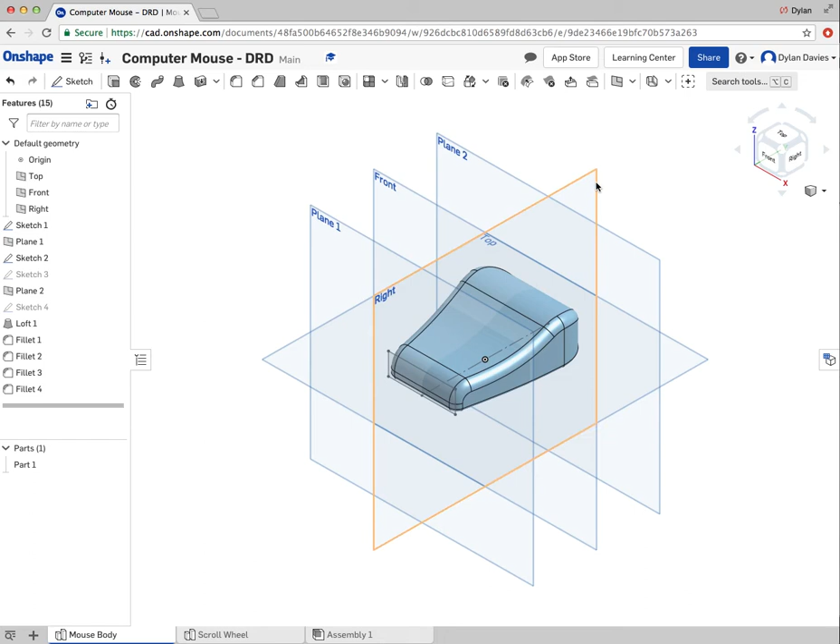So I'm going to draw a new sketch, view it from the right. I just need to make a position where the circle is going to go.

I'm going to start off by drawing a center point circle. I'm not going to allow it to snap to anything, but I'll create a center point circle that's going to be 26. You might be thinking, why 26 when I created a wheel that was 25? Well, I just need to give a little bit of tolerance so that the wheel can actually move around.

Because I didn't allow that to snap anywhere, I can now select the center of this circle and move it wherever I feel comfortable. Now, if I'm being honest, I'm looking at that thinking the top or first part of the mouse needs to be a little bit chunkier, so maybe we'll come back and resolve that at the end.

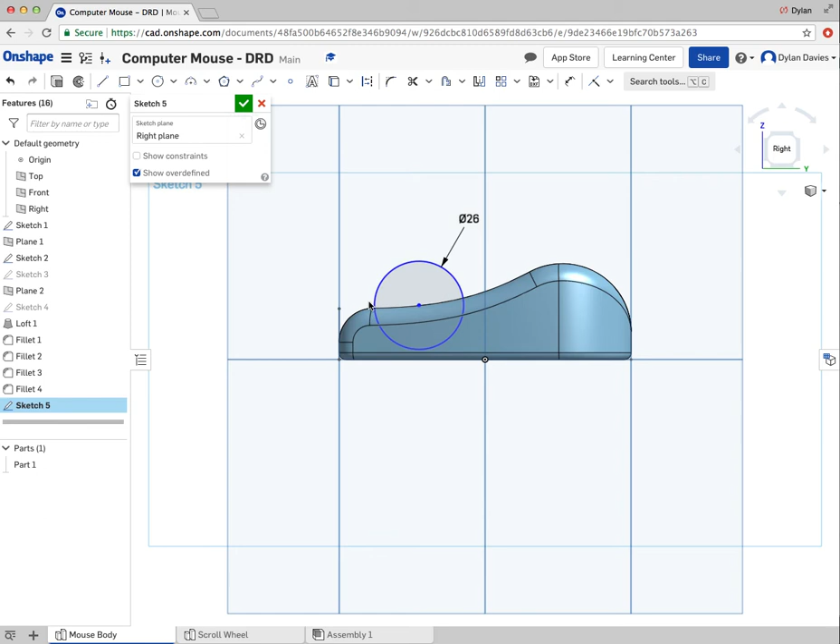So that's the whole part of designing, really. So if I press green tick, and I need to make a space, the thickness of the mouse wheel was 5. So if I now go to extrude...

...and select remove, select the sketch that I want to remove, so it's that sketch there. The thickness of my wheel was 5. Anybody spotted the mistake? Good, so I just need to add a tolerance. Let's add a tolerance of 0.5, or half a millimeter, and select the symmetric tool and green tick.

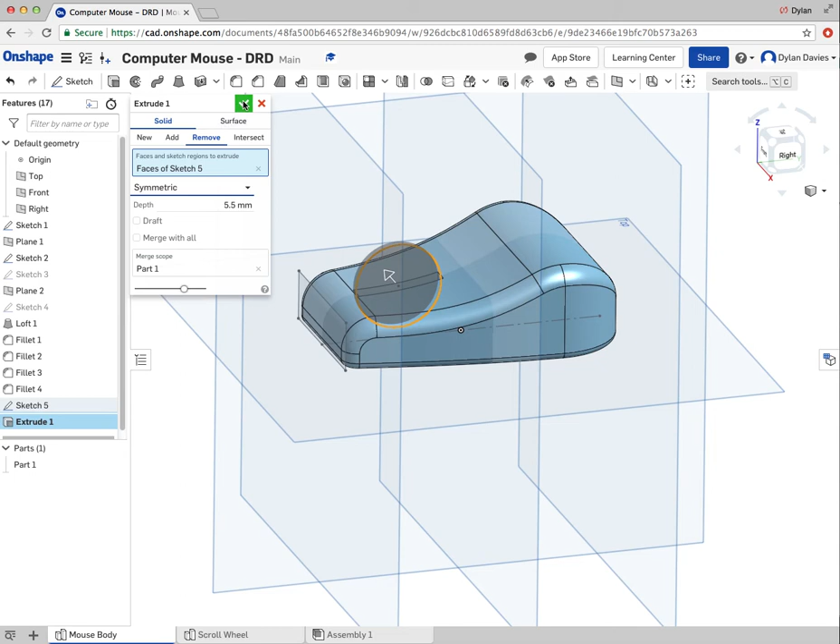Okay, so that's created a little housing for my mouse. Now, as I said, when I drew that circle, I could see that the wheel would probably be a little bit too large, so I'm going to make the front part of this mouse a little bit taller.

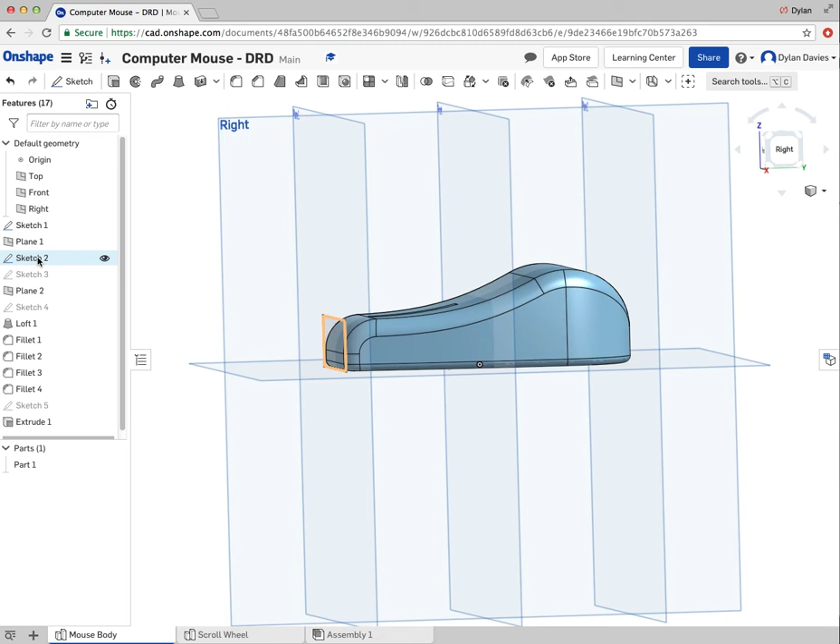So if I go back in and edit this sketch, so it was the first sketch I did, or second sketch, because I did a construction line. So if I click on edit...

Let's view it isometric. I'll view it from the front. Let's make this a little bit taller, take it up to 20. Green tick. Hopefully the rest of my drawing now should resolve as it does.

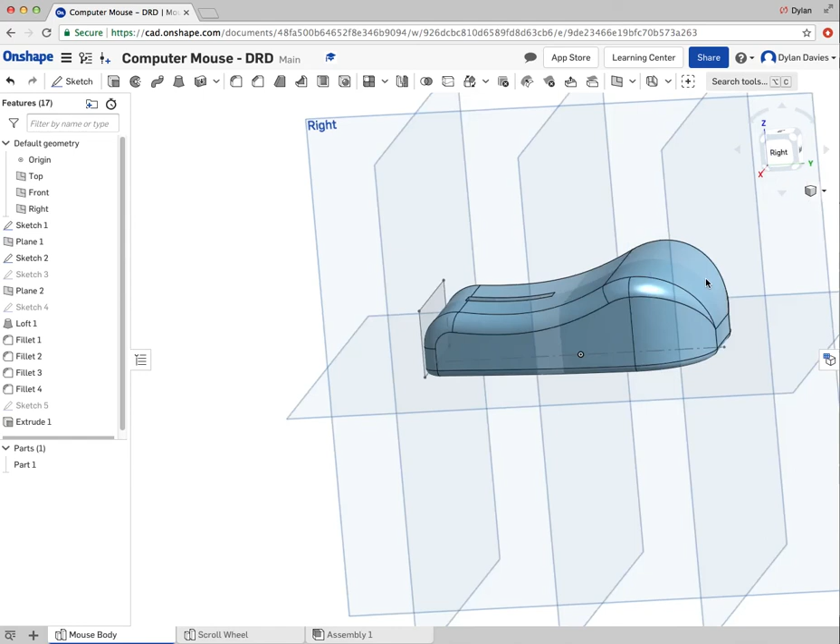So the next thing that we're going to do is start putting all of our parts together in an assembly. So I've got my scroll wheel there, I've got my mouse body. My assembly is something where I bring all of the parts together. So currently there's nothing in my assembly.

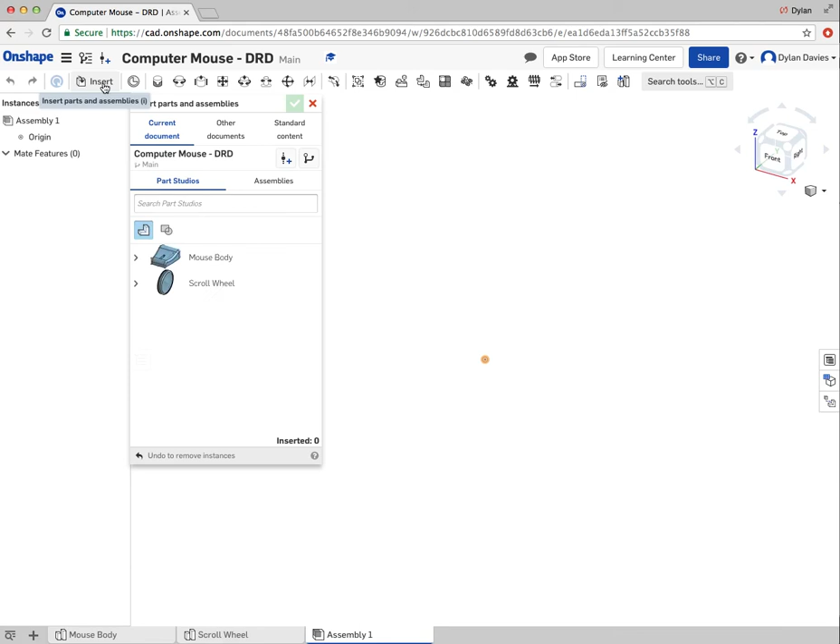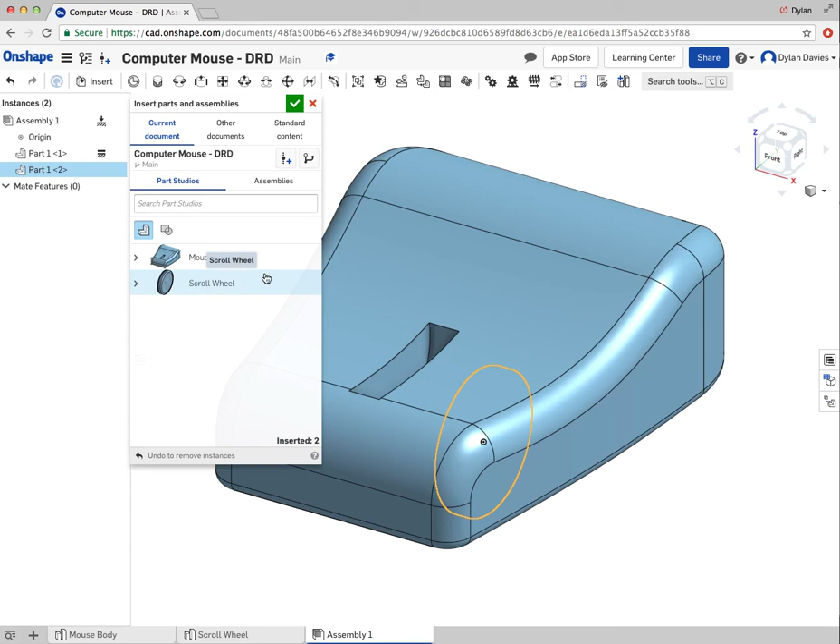So if I click insert, I bring in my first part. My first part is going to be my mouse body. I would tend to bring in the biggest and bulkiest part of your product, which in this case is obviously the mouse body. Because I don't want that to move anywhere, I'm going to right click on it and fix it into position. I'm then going to insert the scroll wheel and put it approximately so it's in position. You see it's a little bit off there, green tick.

Now we'll come on to these mate tools later on, but I just want to explain how the axis and the different planes work. So if I view it from the top, there's 3 planes. View it from the top and put it into position. Okay, it's not entirely accurate, but it'll certainly be enough for a visualization of the mouse.

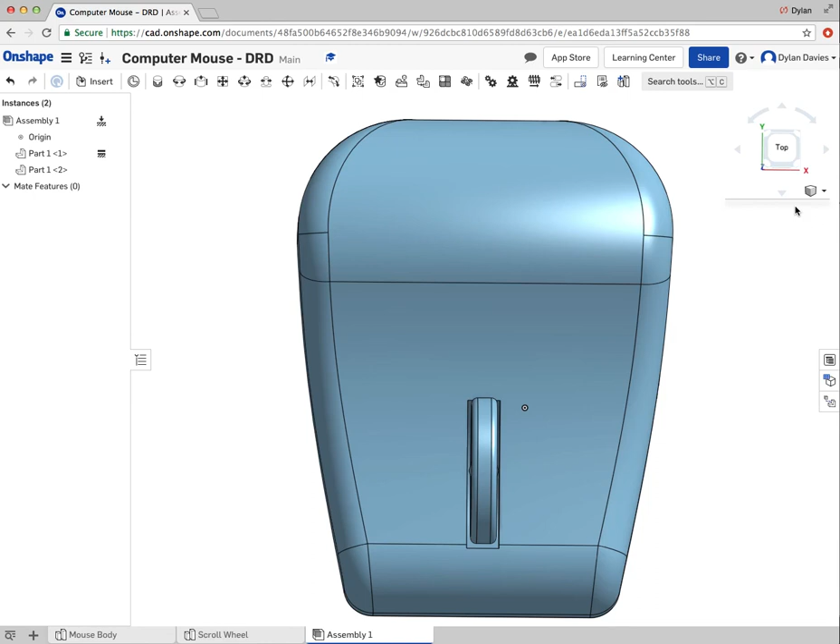And if I view it back in isometric, let's see where we are. You can see it's sitting a little bit proud, looks a little bit like a money box. Click on right, and let's change the view so that it's translucent. I can actually see through the product.

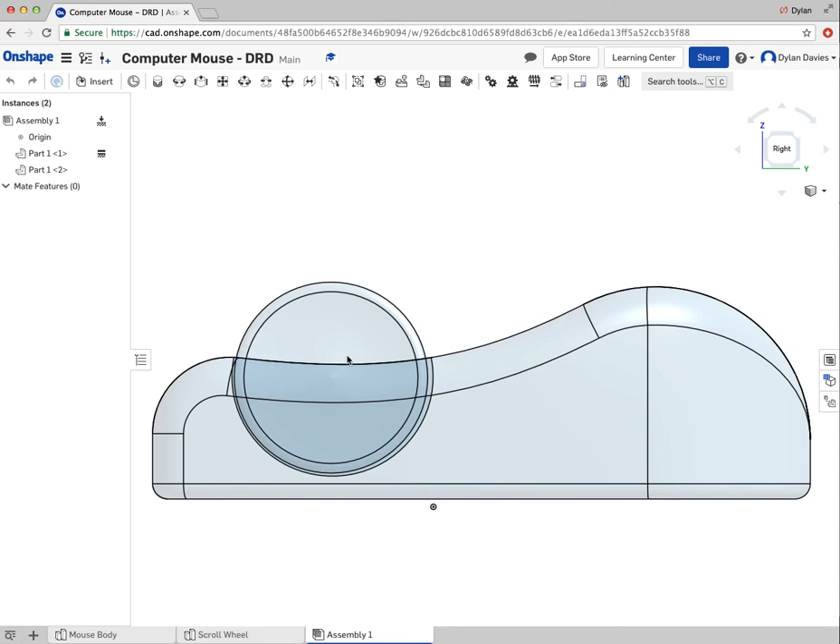Now you can see the housing is there for this mouse wheel. So let's bring it down into position. Because I can only move it down and up, it doesn't allow me to move it side to side in the right plane. Let's view that isometric and bring it back to shaded.

And there you go, so that's a really quick way of doing an assembly. As I said, you can use these tools at the top here, but I find that for most pupils it's probably easier to do it across the 3 planes.

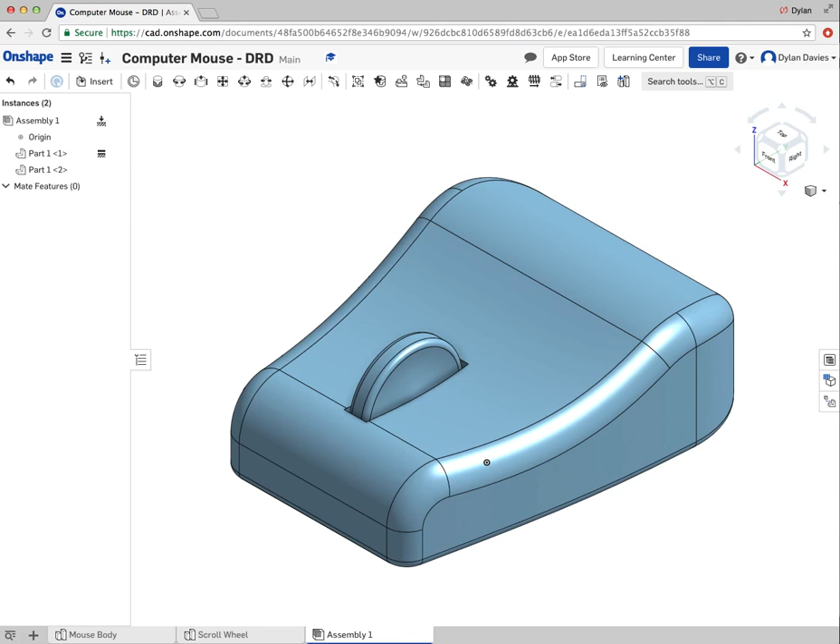So the next plane would be there. Well, I can see that it's centered. So put it back to isometric, and you can start to see that I'm building up my assembly of parts.